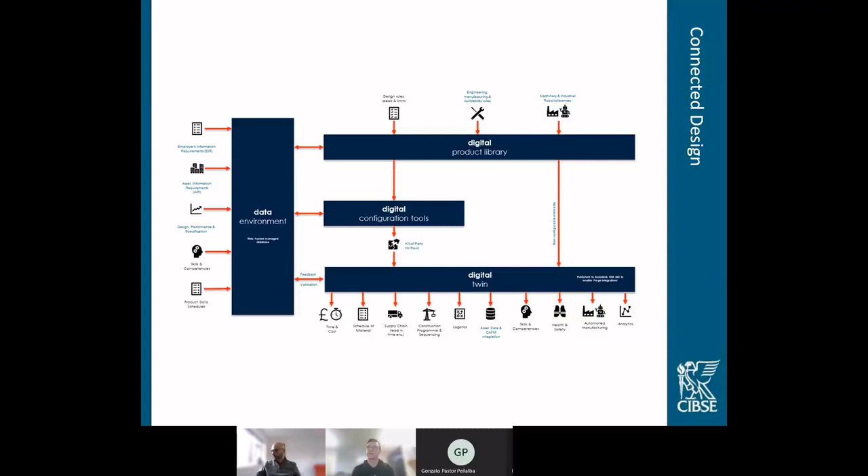Now, if we can produce these elements on the left-hand side consistently in that machine readable format, then we begin to unlock some really sophisticated downstream process, which does include some of the innovation in fabrication and installation. If we have standardized entities, for example, we can start making use of automated manufacturing techniques. So a huge part of the inefficiency that we have to deal with on a day-to-day basis, as I'm sure all of you are aware, is this file-based approach to design and manufacture and assembly.

So for the construction industry, I don't believe that the method for us conveying design and construction information has changed in a very, very long time. I'm guessing the Egyptians were creating drawings to create the pyramids. So, we've not really moved on. Today we're using the same paper-based process for schedules, specs, and for good reason. A picture is probably the easiest way for us to understand an idea.

And yeah, we can now create PDFs, but that's just a digital piece of paper. And we might have a few iPads out on site, but essentially we're using an iPad to just look at a digital piece of paper. It's not really groundbreaking stuff. And this paper-based approach means that we really struggle to read this information with a machine, and we're just creating masses of work for ourselves in the checking and reviewing process. So we really need to move away from this paper-based, file-based approach.

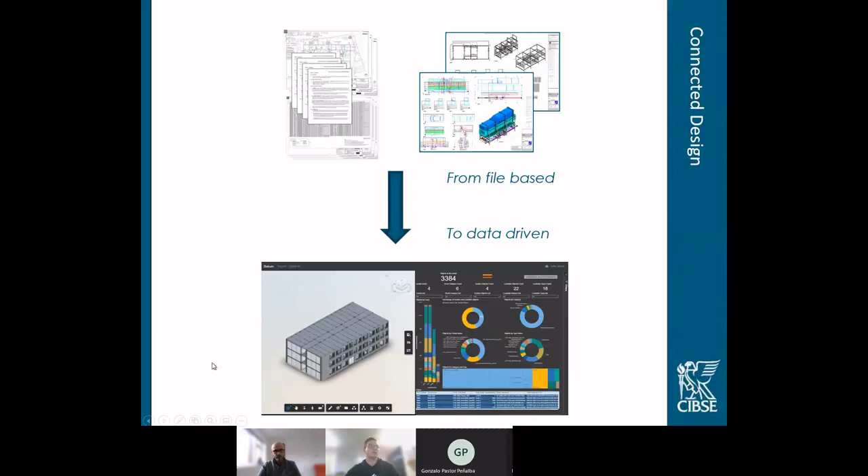And yet we still need to extract 2D information, just like drawings would have, because that's obviously very easy for us to understand. But it all must come from a centralized design model, this one source of the truth that can be interrogated and manipulated by both people and machines. So I'll just give a quick analogy of the process that we've got right now, and I'm sure you're well aware of all this and how inefficient this is.

So this is an example of a door schedule that we get from an architect as a contractor. This is 50 pages long. And this has originated from a design model. In fact, I know it has. It's come from a Revit model. So the architect has spent all of this time developing a design model that could potentially be interrogated directly. But instead, because of the status quo that we have right now, it's essentially printed out as a piece of paper. So then that has to be checked internally by the architect for their internal technical assurance process, and not machine readable, literally probably someone there with a felt tip pen marking it out, checking it against a drawing and so on.

That's then issued to the contractor. Then we've got a person reviewing the same thing, possibly commenting on it and going around in this cycle. This person has to then check internally for us, line for line, 50 pages, which in this particular project, I have over 3,000 doors. And in that time, this person's likely to be sat at a computer, ideally in an office, maybe at home now, but being distracted by someone in the office or the kids running around. So just a very error-prone process and completely mind-numbing.

Then this is issued via the contractor to our door supplier. They then create a piece of paper. They have to do the same process and review it. More pieces of paper. This is then 24 pages long. This is then sent back to us and checked internally again, and so on and so on.

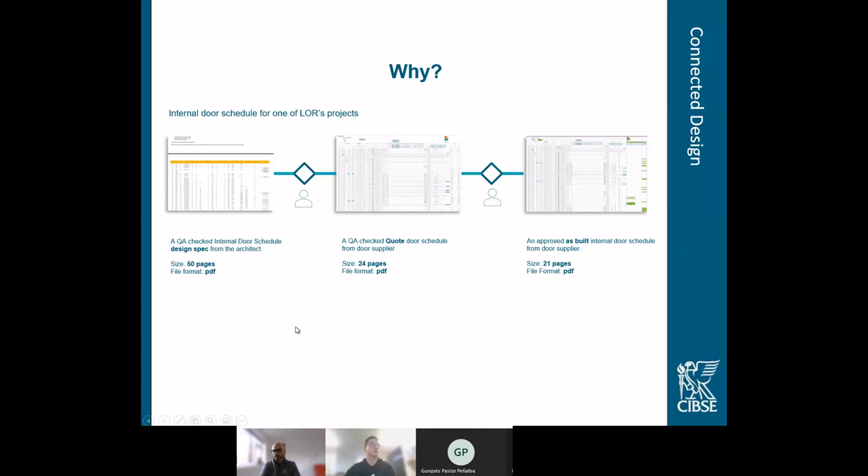So if we just go to how we think this could be improved, we think the whole process needs to be data driven, as we've said. And what we think we need to start doing is seeing our design models as just one big database. So people tend to focus on the 3D geometry, and yes, it's important. We need to make sure all things fit and they coordinate. But this is just one part of the design. The data is probably the most important part, I think.

And until now, most of the data is kind of an afterthought, or at least distributed in 3, 4, 5 different places. You know, some of it's in the model, some of it's in the drawing, some's in the schedule, some's in the spec, all of which right now aren't really linked together.

And what we're also aware of now, most of you have probably already discovered this as well, is that a lot of the design tools are not suitable to hold vast amounts of data. I'm not naming any names, but trying to cram thousands of properties into some of these design authoring tools is not the way to go. They're just not designed for it to work effectively.

So what we need to start looking at is what we're suggesting here. So it's the integration of design authoring tools and suitable data management platforms, built specifically to hold vast amounts of information, and this is where our future efforts are being focused at the moment. This is just a bit of a mock-up of how this might work. So on the left hand side, designers producing information like they do right now,

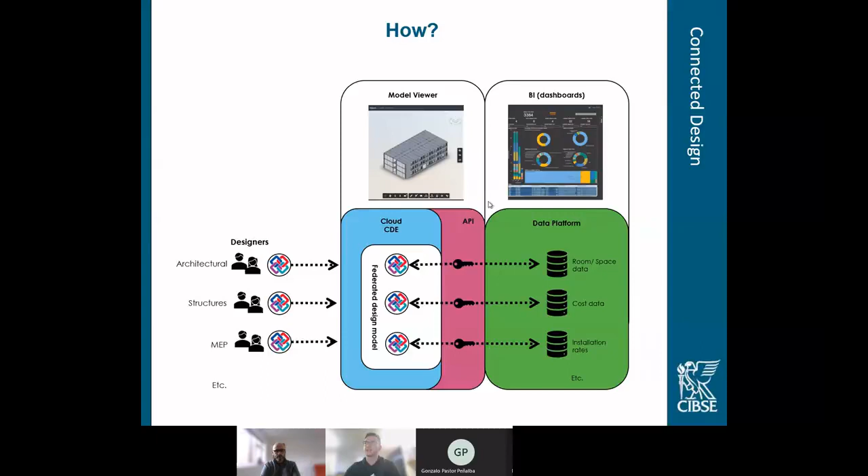So this is just a high-level overview of some of the enabling technology, and I'm going to run through a couple of the tools and processes that we're either looking at now or reviewing in our R&D team. So the first one is the Autodesk Forge platform. Other similar stuff's available like 3D Repo. So I'm just going to go on to this video, so bear with me a second.

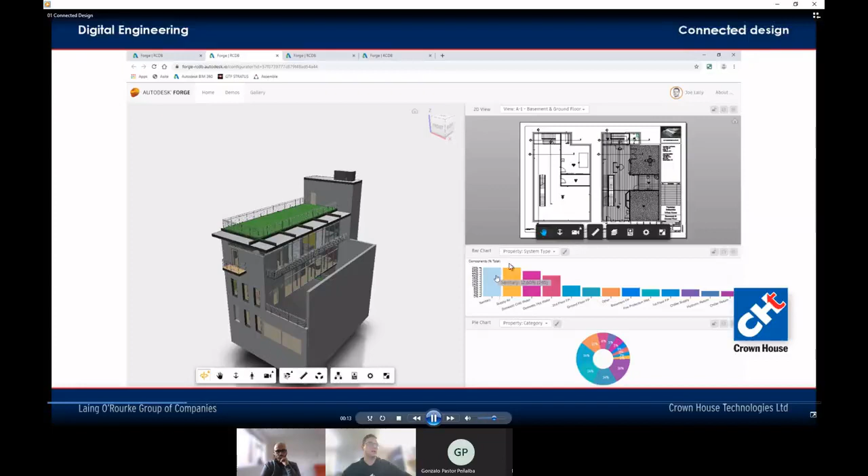So all of this stuff we're about to see here is all available on Autodesk's free demo website, so you can go in there and have a play with it yourself. But what you can see here is a design model and 2D extraction from that, and some kind of BI. But you can see here that all of this is linked together. You can filter out the design, the data, and the drawings all from the same place.

This is essentially all the information that you'd see on maybe a schedule, a drawing, or potentially even a specification. You could bring all into one interface. So there's no need to create these masses of information. It should all be integrated and brought together into this one thing.

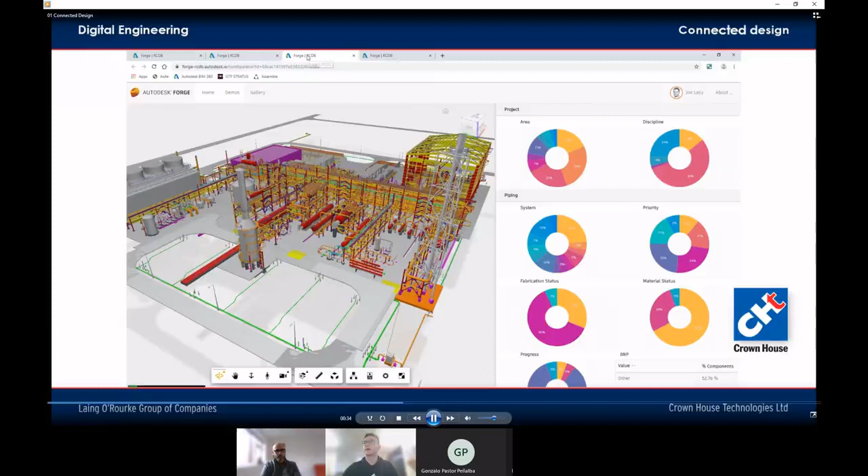And just to prove that this is sort of scalable, this here is some kind of processing plant, which is a very vast and complex system. And you can see again that all of this here is data driven, and you can start chopping and analyzing this all from this one system. All based on the same cloud-based technology that we've just discussed a second ago.

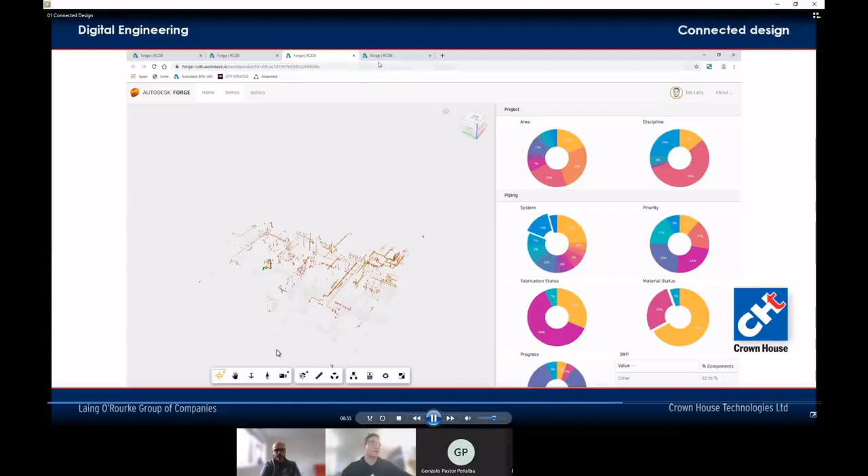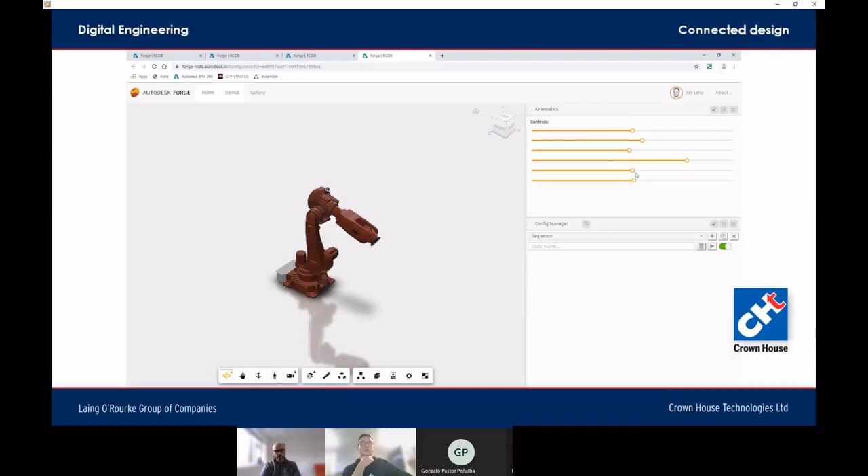And eventually, using the same system and the same technology, we can also start to drive manufacturing, industrial robotics. So not only can we use this to design and analyze, we can also then use it to start producing things automatically in the manufacturing center. So that's that one.

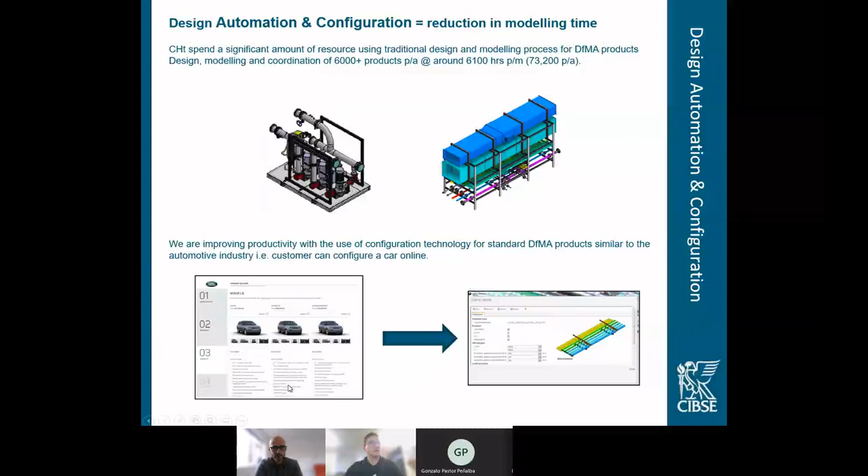So what we looked at really was similar to the way you can in the automotive industry. I can go online and configure myself a new car or Range Rover or BMW just by clicking a few things on a website. So we thought, well, why can't we do that for our DFMA products? And again, I've got a short video just demonstrating this technology in action.

So, is the video all coming through okay? Neil, could you just, yeah, brilliant. Yeah, it's coming through fine. Right, this one doesn't seem to want to play, does it? There we go. Start again. Is this one okay? Yeah, cool.

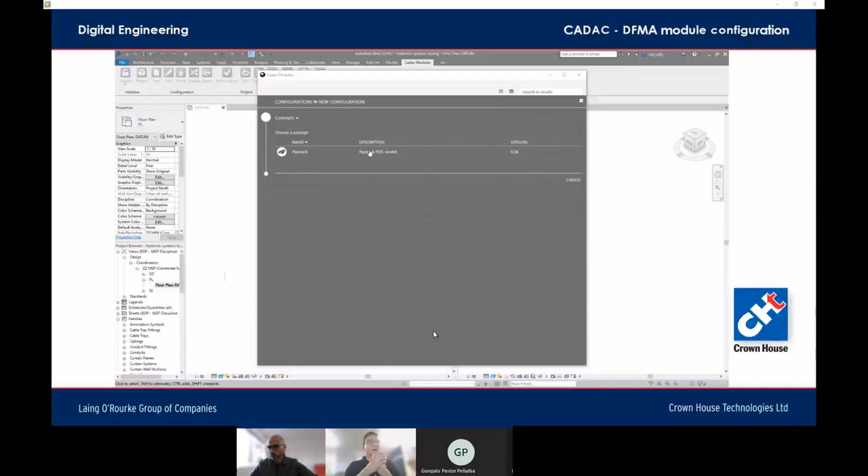Right, so you can see in the Revit environment. So rather than our guys traditionally modeling stuff, we thought, why can't this be parametrically driven with just a few drop downs? So you can see here, this is an example of how you could build a system that could, just using a few drop downs, reduce the errors, because we define all the engineering rule sets and everything behind the scenes. So our team now can just configure one of these modules using defined inputs.

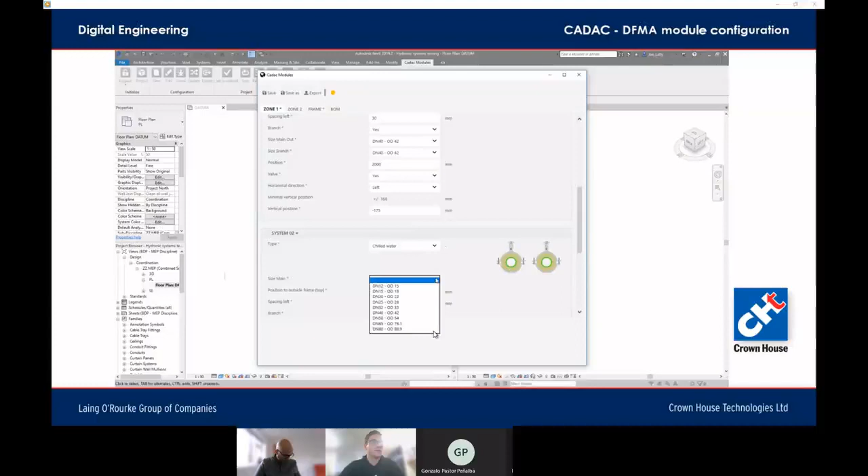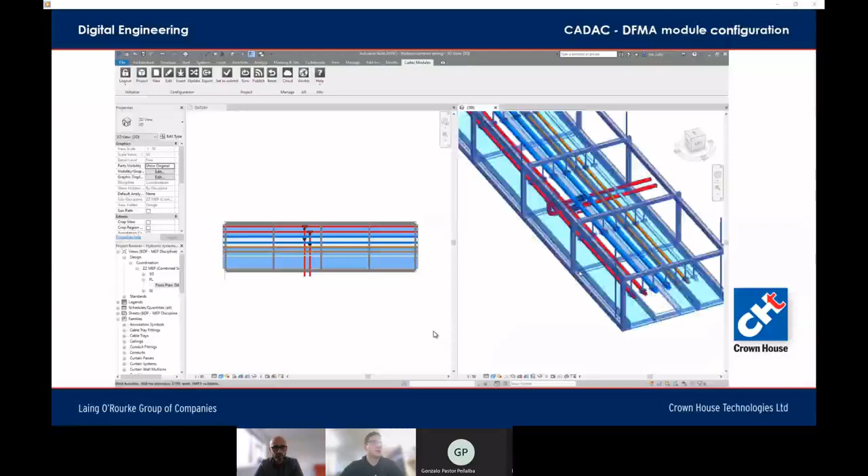So you can see here they're starting to put chill water onto the system, checking all the spacings. There's logic behind here, so you can't put stuff on top of each other and so on. So you get the idea. Click through, and more importantly, this is then saved into the cloud and then transferred into the authoring tool. And you can see here that creates a module. It makes the perfect module almost every time. You can see that then is developed in 3D, and you can go back in and tweak things where necessary.

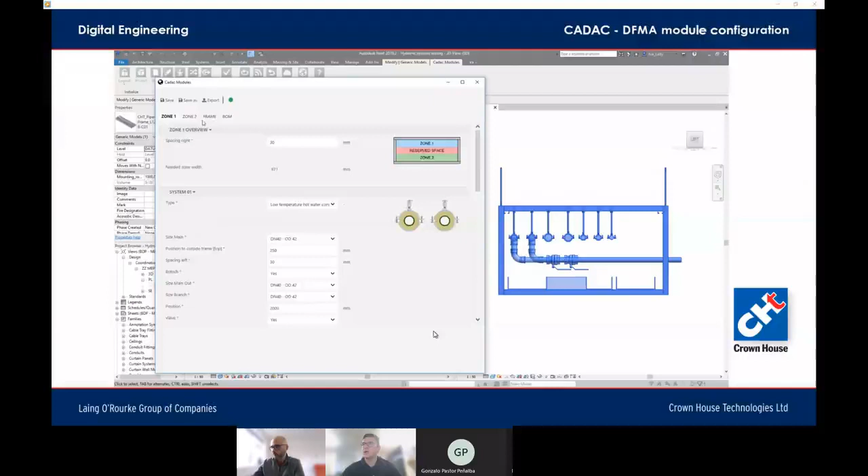So a key metric here, it typically takes our team around 5 hours to design one of those modules traditionally, and using technology like that, we can reduce that to literally a matter of minutes. So there are big savings to be had with this sort of configuration technology.

Okay, so similarly to the process of modeling, right now our team will model these things, but then they'll also produce many hundreds or thousands of manufacturing drawings for each of these things, and that again is just to convey the design to our guys in the factory, on the shop floor, what it is, and the schedule and bill of materials, how it's put together. And they would use these paper drawings out on the shop floor to develop that.

So again, thousands of drawings, 24,000 hours of drawings time per year. So again, we were looking at technology that could, how do we stop doing that basically?

So what we found, again, using similar technology that we found before: why can't we just send the 3D file directly onto the shop floor and enable the shop floor with some model viewer technology, and try and make the manufacturing center drawingless? We're in pilot with this at the moment, and it's working really well. We did think the guys on the shop floor might not want to transition from drawings, but as soon as we showed it to them, they absolutely loved it.

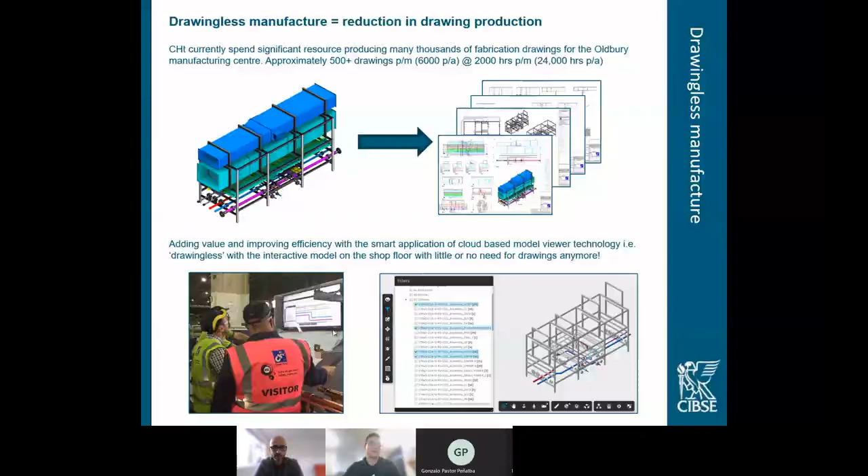So again, I've got a quick video showing a bit of design automation and manufacturing, paperless manufacture. So Neil, could you just give me a heads up? Has this come through okay?

Yeah. So you can see here, this is one of our modules. Traditionally, what our guys would have to do is select each one of these. You can see here, this might be chilled water flow and return. And what they'd have to do is break these up into what's called a spool, for those of you who aren't in manufacturing. So one spool might be this individual run for the flow, and another spool, an individual piece that gets welded together for the return, and so on.

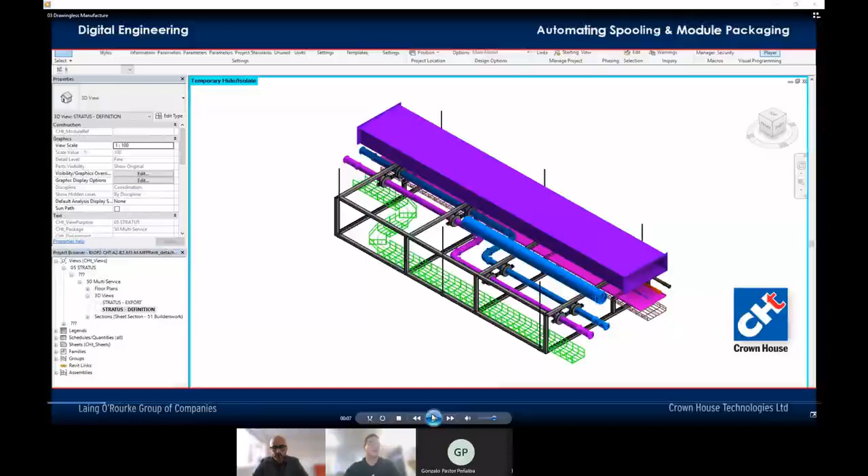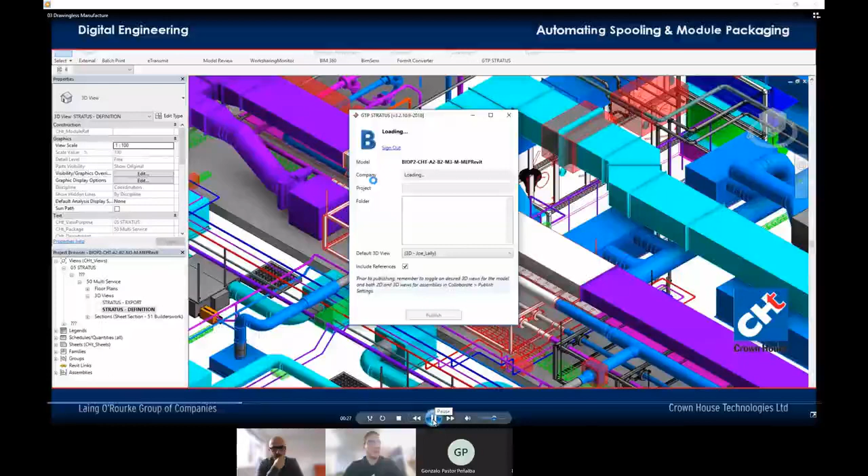So they'd have to define that in the model, and then break that out into different drawings to show this spool, that spool, the frame, do all the dimensioning, all that kind of stuff. But what we've developed now is using a bit of design automation. Using a bit of Dynamo, we can select this thing, tell the machine this is a module, and it does all of the spooling automatically. So all of that is done within a few seconds, which would probably take a good few hours. This is then published up into the cloud onto a system called Stratus, from a US-based company called GTP, which developed this.

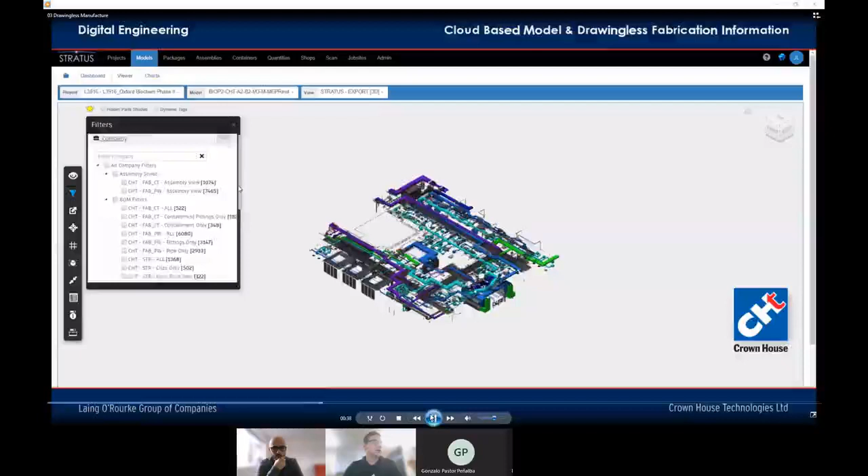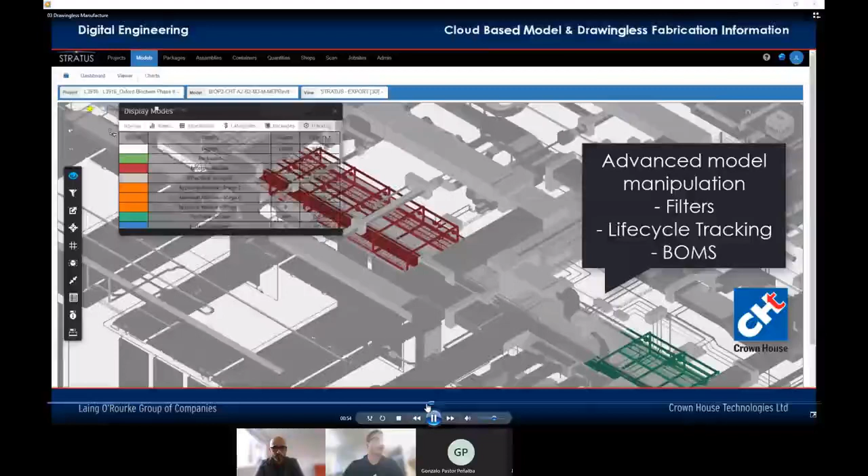And you can see now, again using web-based viewer technology, we can go in and filter stuff down. Here's all the frames, here's all the pipe work and so on. But importantly, what we can do now is produce digital drawings almost. So the information that used to be sent into the manufacturing center, rather than being on a drawing, is now based in a model. We can create lots of bills of materials and all that stuff rapidly as well, which I forgot to mention. But here you can see we're zooming into this module.

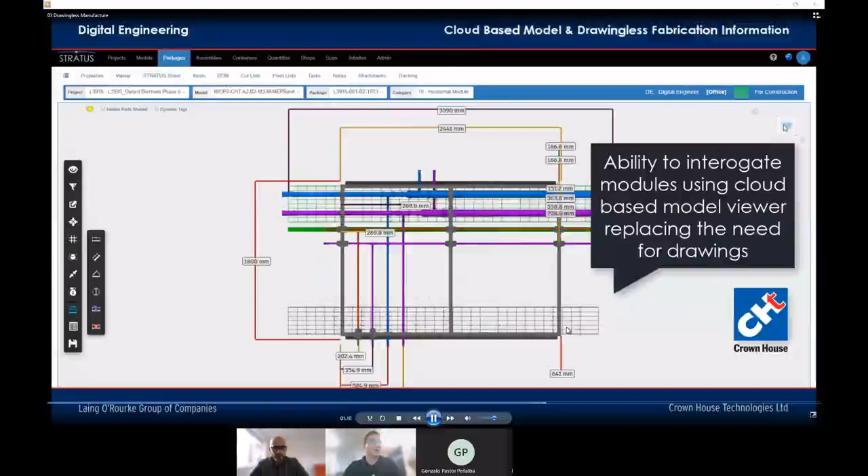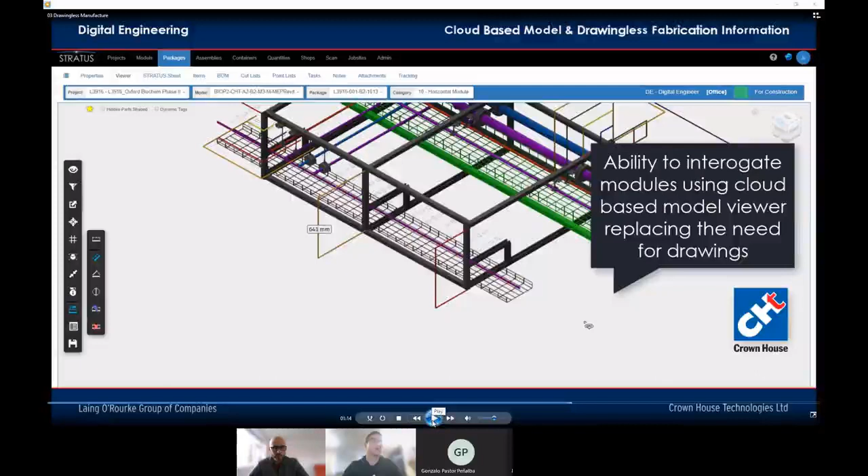So this is the module itself, and you can see this is basically all the information you could ever want on a drawing and more, because sometimes when we're modeling, we can't put all the dimensions on, or stuff gets missed, or it's very manual. Now we're putting the power in the hands of the guys on the shop floor. It can produce automated drawings if we want it to, but I think the drawings will actually just never be used, to be honest, because we're putting the power into the hands of the guys on the shop floor.

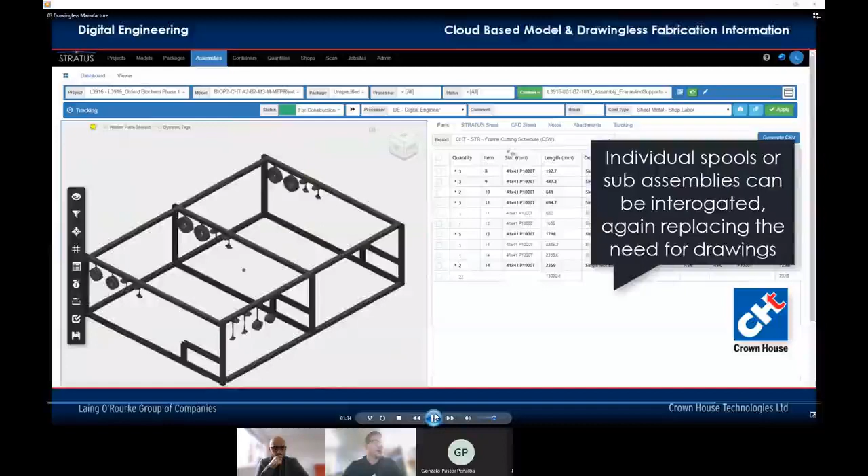They can interrogate this, whiz around it, get the dimensions, the schedule, all from a few clicks of a button. A few iPads and a few screens strategically placed in the manufacturing centre, and it just saves masses of time. All the drawing information that we used to produce just goes away. So yeah, that's an example of how we're using the technology we spoke about. So I think for me that's it.

I'm just going to hand over to you now, Neil.

Okay, thanks, Joe. So hopefully Joe's done a good job of explaining the need for the common data environment, or the central repository for the data. So rather than using conventional BIM tools to hold the data, we're trying to move to a position where we're managing the data of all of our project delivery products and business systems in the same place, so we can gain value from using the same data for multiple uses. When we move to that place where we're capturing data, it opens up a lot of opportunity in terms of how we can be more efficient towards the latter stages of the construction cycle. So in the installation, manufacturing, commissioning stages, we can gain a lot of value through the better use of data.

One thing that we're starting to explore is how could we use data and analytics around that data to help us drive a more effective commissioning process. What you see on screen is what we would typically experience. So we've got an installation, testing and commissioning process which is well defined and it's robust with strategic gateway points before we can complete through to the next stage of the process.

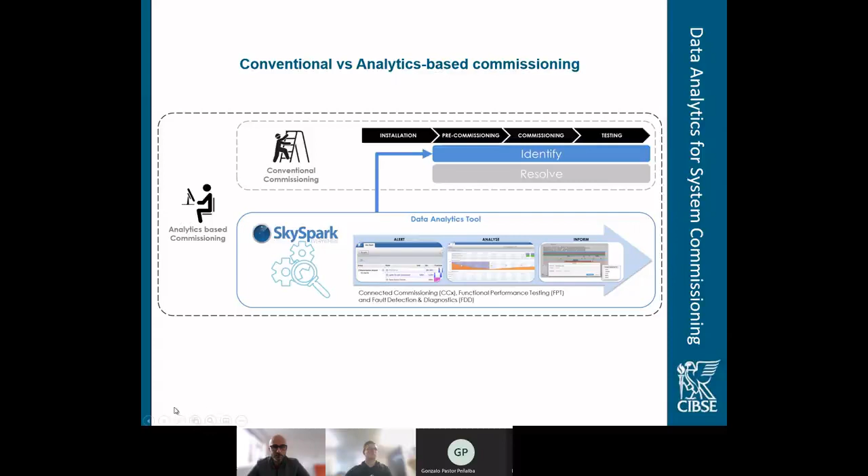So that kind of wraps up the case studies that Joe and I have taken you through as part of this final session. I suppose I did say it'd be quick. We have got through that in about 25 minutes or so. So hopefully it's not been too quick for you.

I'd like to hope that through these 3 sessions you've gained an appreciation for what a DFMA process is and how we can establish MEP offsite products within our projects. I hope you can see the gains that we could experience across the full remit of stakeholders in the project. I hope you can understand how we can drive those benefits into each and every one of those stakeholders.

And finally, I hope you can leave these sessions with a bit of a positive spirit to understand that the industry is changing, and there's a lot of technology that's enabling that change. And I think moving forward, we've got a real opportunity to make significant step changes in productivity of our design and construction operatives. And I think it's a really exciting part of the journey that we're all undertaking within the construction sector.